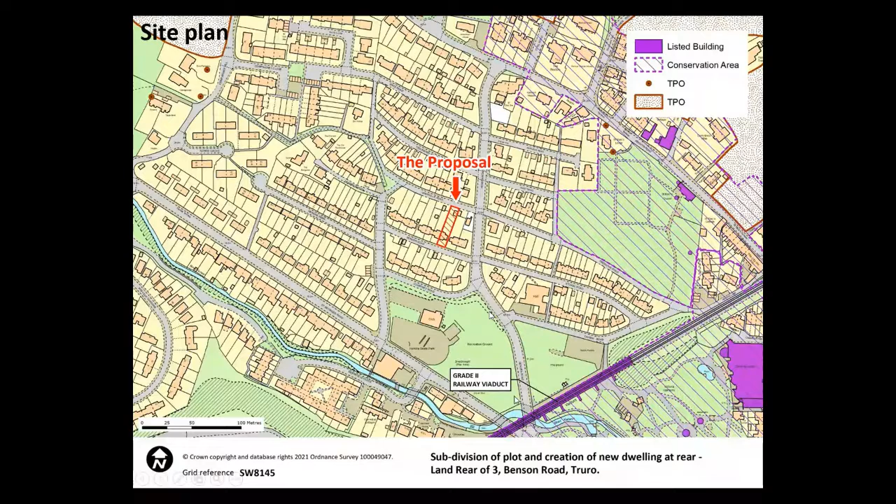So this is the site location plan. It's on Benson Road, between Benson Road and Grenville Road, which is to the north of the Hendra Skate Park and to the west of Victoria Gardens. As you can see here, it's outside the conservation area, with the conservation area boundary dotted in purple to the east, and the listed viaduct to the south.

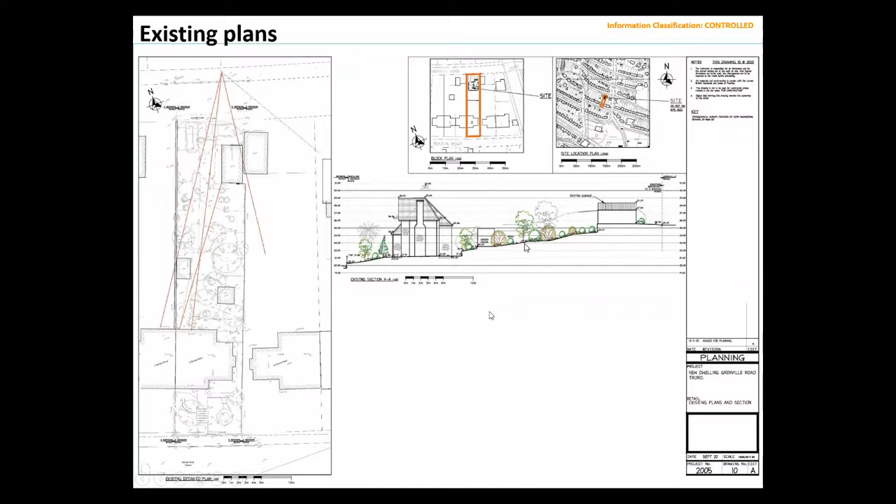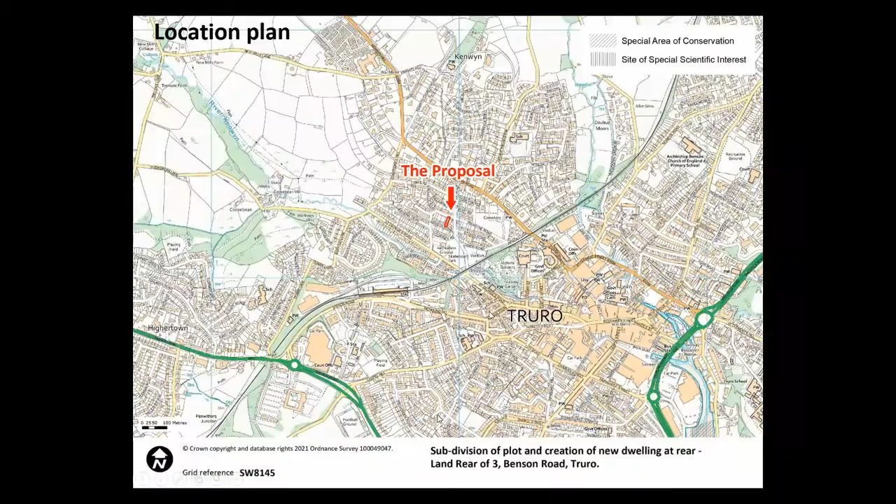Thank you very much. Well, this site lies within a residential area sustainably located within Truro. In terms of constraints, the site's not located within or affecting the setting of a conservation area, does not impact on any listed building or its setting. There are no protected trees or landscapes recognised for their particular importance. The overall estate design is not recognised as unique, such that a specific character, layout or relationship between dwellings, open spaces, freezes the estate in time, never to change.

There is no evidence that the development would cause overlooking or that neighbours would suffer any material loss of amenity. While it's undeniable that the location will change as a result of the development, it is a change to be embraced - positive change making the best use of land as encouraged by adopted policy, creating a home well related to facilities, services and employment, helping reduce pressure to release greenfield sites that impact flood risk, adversely impact biodiversity, and reduce the rural characteristic of the county.

Policies set down the development plan, and particularly in the Truro and Kenwyn neighbourhood plan, are such that the development proposal complies with that document's definition of sustainable development and comprises design, materials common to the area and suitable to the location. There's no specific policy that stands against garden redevelopment in principle.

The section of highway accommodating the proposed dwelling has the rear gardens of dwellings generally to the southwest, facing the front gardens of dwellings generally to the northeast; while some are landscaped, others present a less pleasant appearance. A domestic garage, an area containing domestic paraphernalia, is to be replaced by a dwelling of modern design, not dissimilar to others recently permitted, and set down and split level to respond to contours and avoid adverse impact.

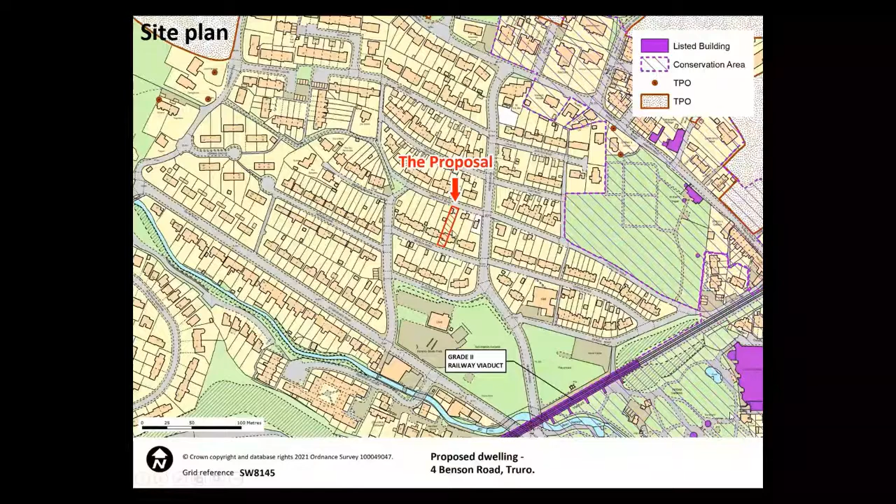During the course of the application, revisions were made to pull the dwelling further away from the existing dwelling at number 4 Benson Road, comprising reducing the depth of the ground floor, so the basement level projects behind it, and pulling the dwelling slightly further forward. There's just one off-road parking space on this scheme, but there is on-street parking, and the highway officer is happy with the proposed parking and access.

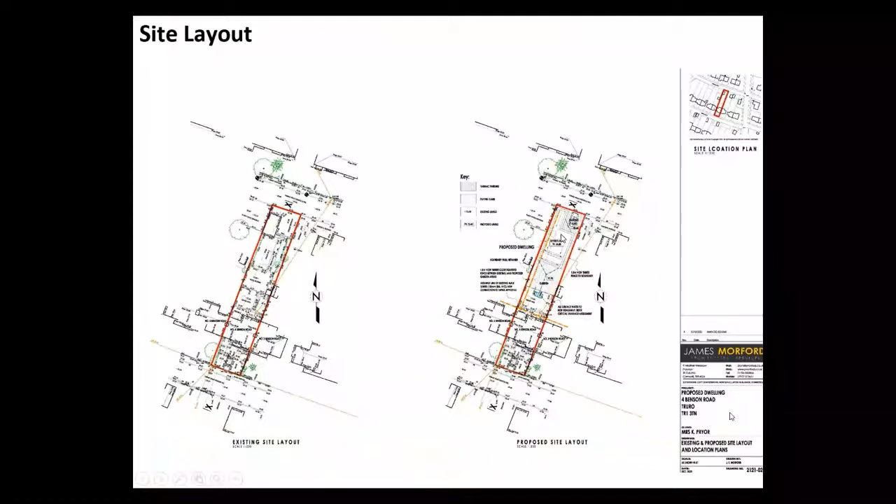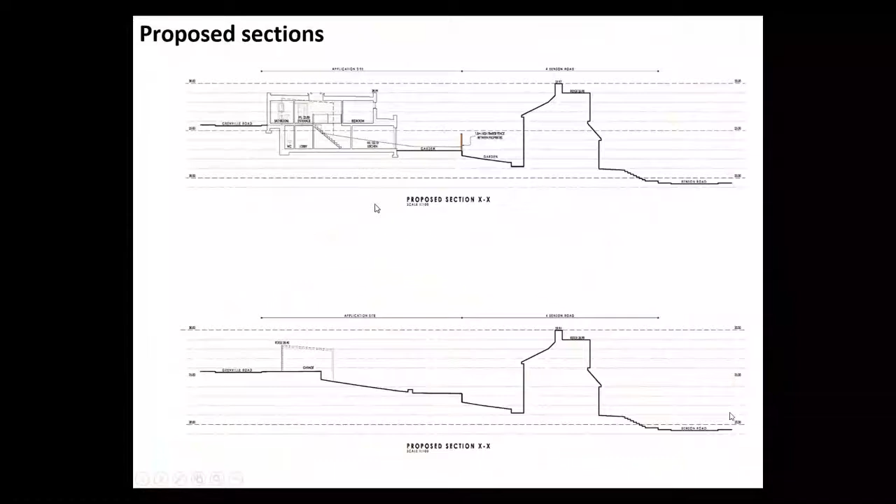The balance of considerations are some benefits in terms of contributing to housing supply. The site is sustainably located. The permission granted at number 1 established the acceptability in principle. The layout, design and appearance are acceptable and not considered to result in unacceptable adverse impacts on the character or amenities of nearby residents. Access, parking and turning provisions are acceptable as confirmed by the highway officer. So on balance, the development is considered to be acceptable and to accord with the relevant policies of the Cornwall local plan, and conditional approval is recommended accordingly.

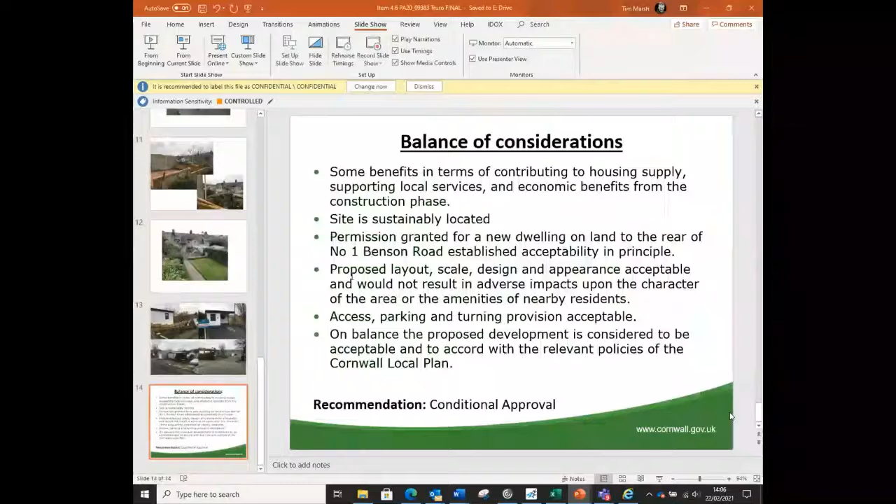We have no members of the public wishing to speak in objection, but Councillor Stephen Webb of Truro City Council is speaking in objection. Councillor Webb, are you there? Yeah, I am here. Would you like to speak on this application? You have 3 minutes and you'll be told when 30 seconds remain.

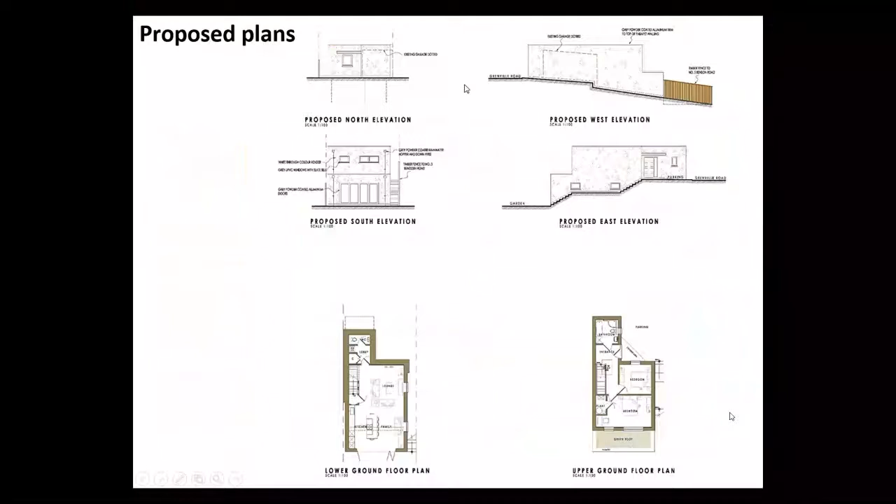Thank you, Chairman. I wonder how many of you would have thought differently seeing this application before the other one, just looking at what's on the screen now. If we go back to the Google aerial view, what we've just voted for is a new street right in the middle of a garden village. That is exactly what Cornwall Council want at Langarth and want in other places. It's exactly what we're trying to develop.

But we've just created the precedent of a complete street right in the middle of the scene, if we can bring up the Google aerial map. I'm just so disappointed by this. Gardens are important. We don't have many estates like this that have reasonable, decent-sized gardens. Just putting those 2 houses right next to each other in that garden, on a street that is so narrow and so overparked already, creates more of a problem for the people parking there. This is so out of character, so overbearing and overlooking. The one on the end is 1 story, but these 2 right in the centre, in the middle, are just a completely different kettle of fish.

I am really disappointed by the decision that was made a moment ago, and I don't know what else to say. I'll yield back the rest of my time. But I do wonder how many would have voted differently seeing this one first on the agenda.

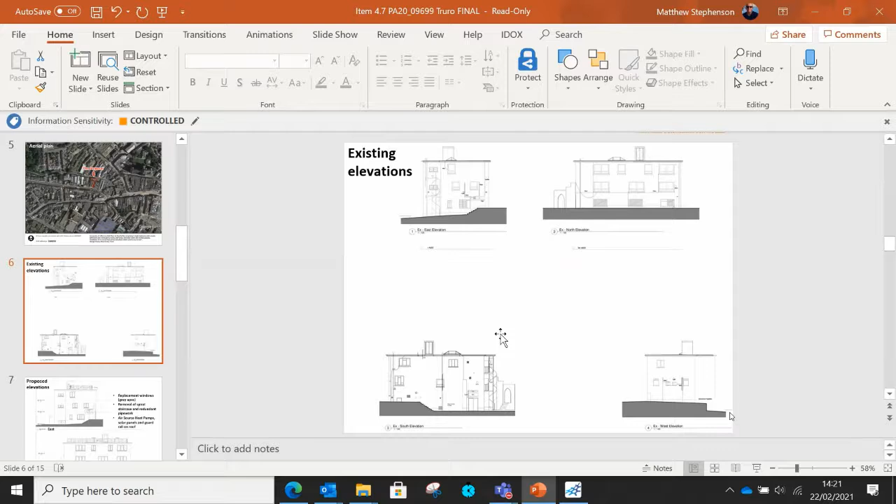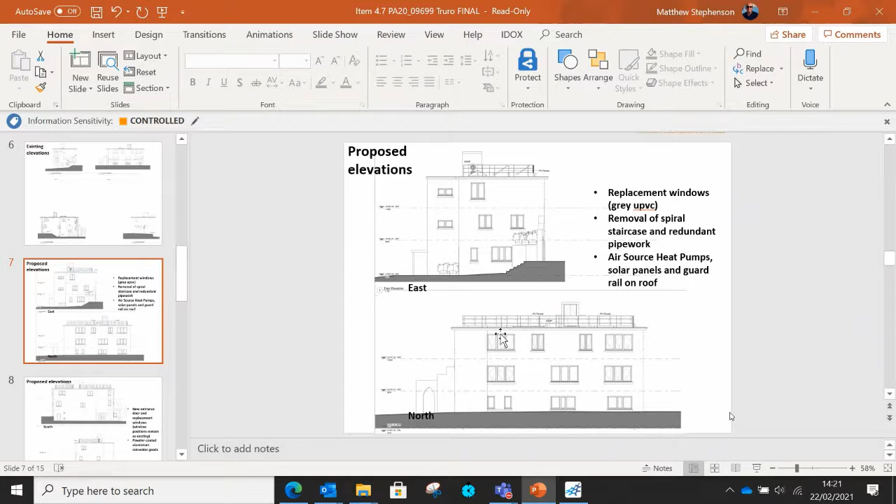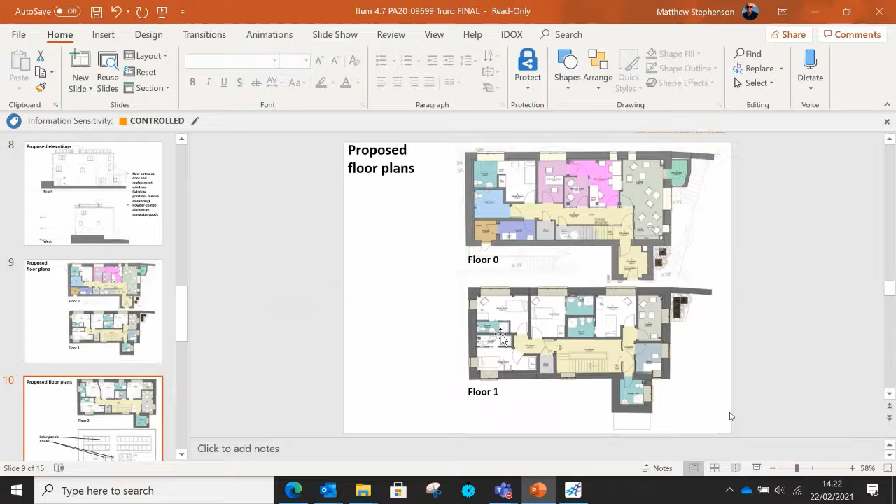Just quickly, this is the floor layout plans. On the ground floor, floor 0, that's got the communal areas and the staffing areas. You can see the entrance doors to it. The first floor shows you the bedroom layout, so all single beds, and again on floor 2 as well. There's also a roof plan showing where the panels are, although they are set back from the front of the property, so you can't actually see them from street level.

There's some upgrading to the outdoor amenity areas. The pedestrian route between River Street and the Leats, which I mentioned earlier, that's going to be resurfaced with granite, which is seen as a positive, with some planters also put in place there for planting.

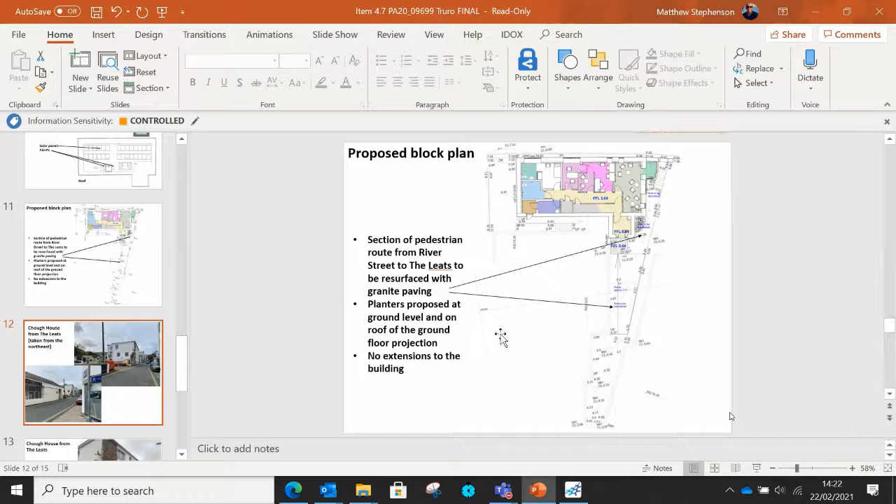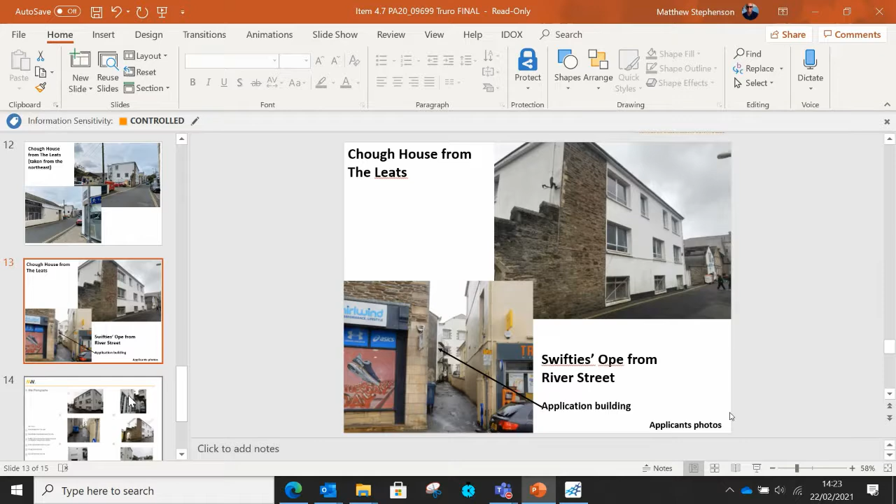And here's some further images just showing the building in its round.

So just to conclude, in the balance of considerations, the proposal will contribute to meeting the council's strategic needs and objectives and statutory responsibilities for housing the homeless. It provides a more permanent solution to the temporary pods which are at Carrick House at present. There are very limited external changes to the building. The case officer considers those to have a neutral impact and cause less than substantial harm to the conservation area and setting of nearby listed buildings, and this would be outweighed by the public benefits of providing the scheme. There are clear social and environmental benefits of the scheme, and these are considered to comply with the local plan and the neighbourhood plan. As mentioned before, the management strategy would be required to be submitted and approved and actioned.

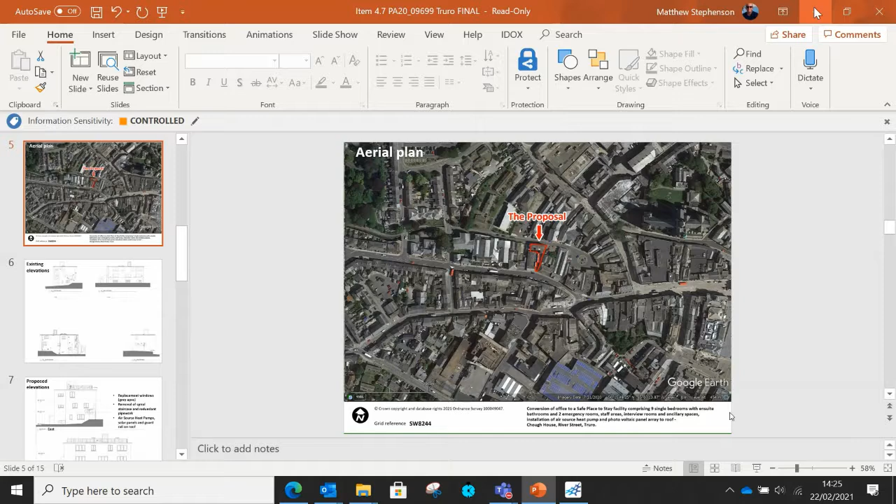Good afternoon, Chairman and members. I'm Cornwall Council's Head of Delivery and Development. Thank you for allowing me to speak today.

Truro is one of Cornwall's hotspots in terms of the number of rough sleepers we have. Sadly, since the start of the pandemic, that need has grown and the council is now providing significantly more people with temporary accommodation compared to this time last year. In response to the government's Everyone In drive in 2020, the council and partners worked tirelessly to provide additional emergency accommodation to house vulnerable people that may otherwise be on the streets and at increased risk of contracting COVID-19.

These schemes have been highly successful, arguably none more so than what's become known as the Carrick Cabin site, which has provided 11 emergency accommodation pods. The site has received praise from support organisations, the media, police and residents themselves. Provision of such accommodation has proved to be game-changing. We've been able to properly engage with people with entrenched rough sleeping behaviours and provide them with safe, warm and dry accommodation, and help them on a pathway to settled housing.

However, schemes like Carrick Cabins are only temporary. We need a range of permanent facilities. This is why I'm presenting Chough House to you today, which is the first in what we hope will be a programme of permanent initiatives to provide specifically designed, high-quality accommodation to help end the need for anyone to sleep rough in Cornwall.

The proposal seeks to renovate a vacant building in the centre of Truro into a new, bespoke, rapid assessment centre. The scheme's been designed to work with the historic nature of this building's fabric and bring it back to life. It will provide 9 self-contained bedrooms, including a disabled access room, each with ensuite and kitchenette.

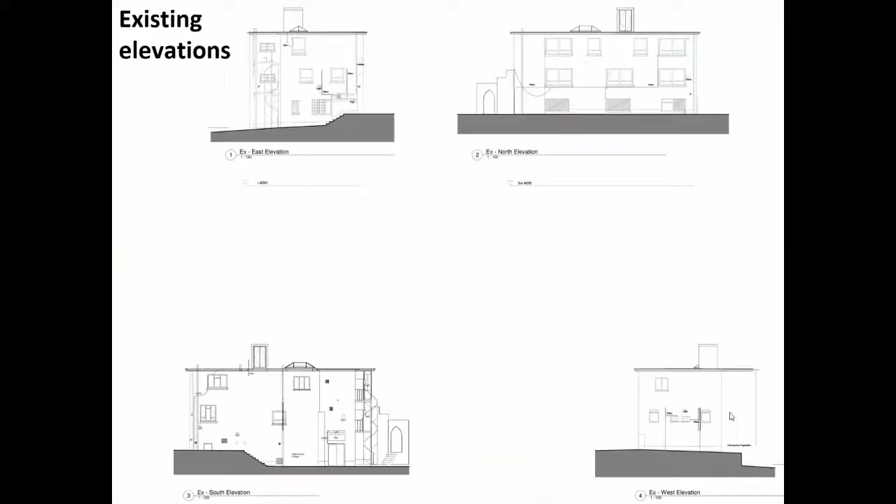The facility will be managed 24/7 by Cornwall housing staff, along with out-of-hours security services similar to the Carrick Cabin site. The building's been designed to provide safe, warm and dry accommodation with space to provide necessary support services. This would be for anything from 3 nights to 6 weeks, depending on the extent of support required, before people transition into medium-term move-on accommodation on their pathway back to settled housing.

We've consulted nearby neighbours and businesses and have received support from a large number of consultees, including Truro City Council, the Mayor for Truro, the police and a number of support services. 30 seconds remain. If approved today, we'll be looking to commence construction in mid-April. This will allow us to have the building up and running in time for the winter 2021 season.

This is a rare opportunity to provide a genuinely high-quality, purpose-designed facility to help vulnerable rough sleepers, and one that can make a huge difference to both Truro and those it will accommodate. I urge you to support this proposal. Thank you. Thank you very much.

Are there any questions for Mr. Irving, please? Councillor Mould. Yeah, thank you, Madam Chair. Hello, Sam. I'm assuming that the one shop that had an issue is possibly around the alleyway. Is that going to be CCTV covered? I'm assuming the police generally aren't happy with alleyways, are they? Because they're breeding places for all sorts. But are you happy that you can monitor that safely, or can you overcome all the issues that there may well be?

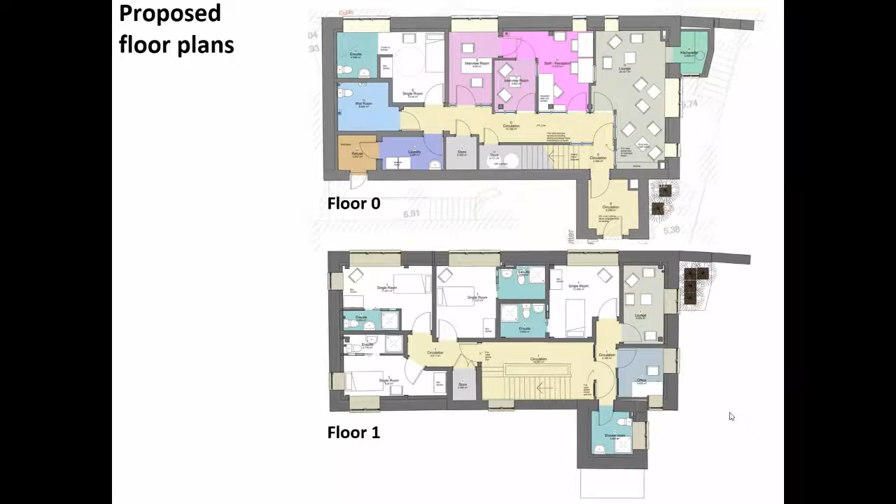Security and staff will be on site the whole time. All of the surrounding neighbours, whether that be commercial or residential, will know the support team, and they'll be able to access us by phone without any delay at all. And in the event that there were to be an issue in and around the area, then the support team can come out and help resolve that. I am confident that we can manage any issues should they arise, as we've proved we've been able to do on the Carrick Cabin site.

Yeah, I mean, it really looks as though it's going to be purpose built and very fit for purpose. So I'm happy with that. Thank you very much. Thank you. Thank you. I see no further questions. Can you concur, please, Vice Chairman? Yes, correct, Chairman. Thank you. Thank you. We thank you very much then, Sam.

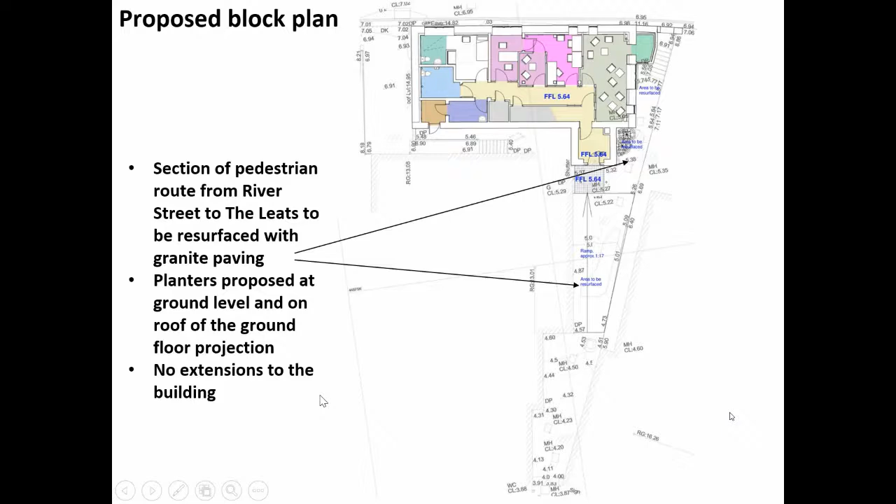You've got Councillor Kenny there. I think Councillor Kenny has probably posted that by mistake. Councillor Kenny, any questions? No, right. So no questions of the planning officer, nothing shown. Can you confirm that, please, Vice Chairman? Yes, Chairman, thank you.

Then in that case, we move straight into debate, please. Councillor Mott. Thank you, Madam Chair. I just think this is a brilliant scheme. It looks as though it's set out, and I would like to propose that we approve as set out.

Thank you. Councillor Kenny, you've indicated, would you be happy to second that? Happy to second. No one's objecting. The concerns of the shop, I think they've been mitigated. So yes, happy to second.

I will, Councillor Dyer. Councillor Thomas. Yes, Madam Chairman, just to say that this is, you can't say any other, that this is a much needed scheme. The more we get of these, the better it's going to be. It's far better for having these people now living rough on the street to be in one building where they can associate and meet with each other under these carefully controlled circumstances. It's such a wonderful idea, Madam Chairman. It needs all the support we can give them and more to come. I agree. Thank you very much, Councillor Thomas.